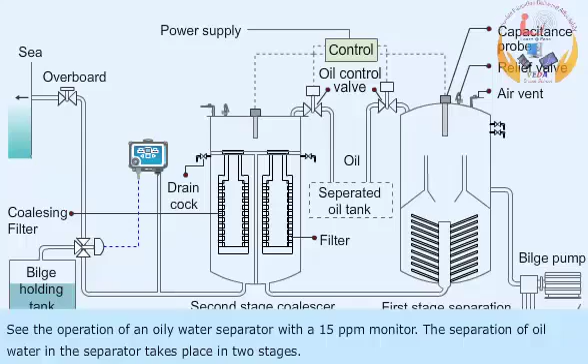Oily water separator. See the operation of an oily water separator with a 15 ppm monitor. The separation of oil and water in the separator takes place in two stages. In the first stage, the separation is by gravity, whereas in the second stage, the separation is by coalescing filters.

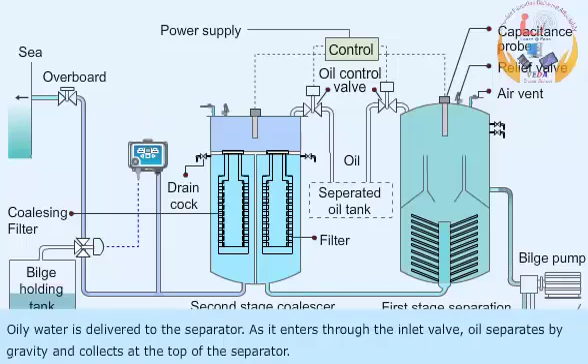The bilge pump delivers clean seawater to the first stage of the separator through the inlet valve. The vent is kept open till all the air is removed from the separator and water issues out. Oily water is delivered to the separator. As it enters through the inlet valve, oil separates by gravity and collects at the top of the separator.

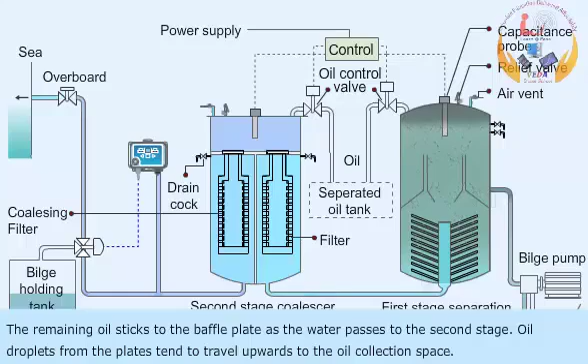The remaining oil sticks to the baffle plates as the water passes to the second stage. Oil droplets from the plates tend to travel upwards to the oil collection space. Oil from the top of the chamber is automatically drained to the oil tank when the level reaches the bottom of the sensor as shown.

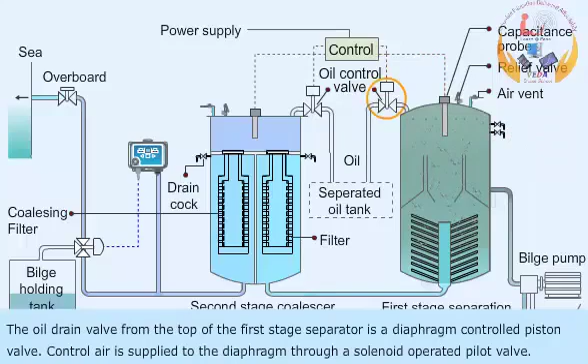The oil drain valve from the top of the first stage separator is a diaphragm-controlled piston valve. Control air is supplied to the diaphragm through a solenoid-operated pilot valve. The capacitance probe senses oil quantity in the collection space and energizes the solenoid through the control switch.

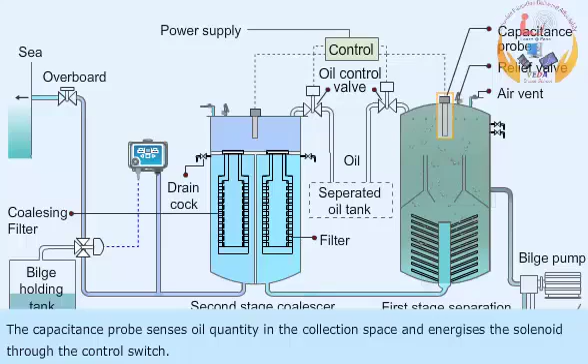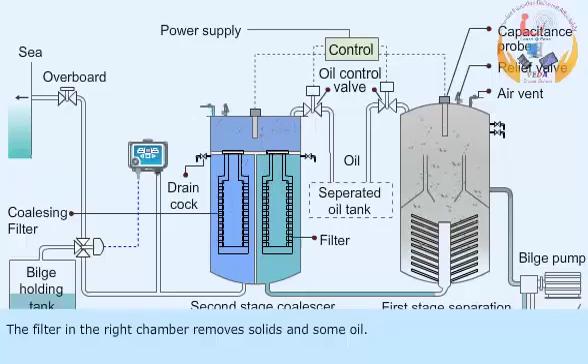Water passes downwards from the first to the second stage coalescer through a central pipe. The filter in the right chamber removes solids and some oil. Coalescing filters in the left chamber take out the remainder of the oil in the form of small droplets, which coalesce to form larger drops. These rise to the oil collecting space. Oil content of the final discharge is below 15 ppm.

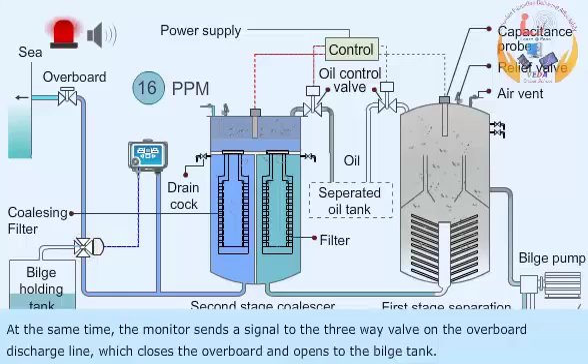In case the discharge of water after the second stage is more than 15 ppm, the monitor senses this and gives an audible and visual alarm in the engine room. At the same time, the monitor sends a signal to the three-way valve on the overboard discharge line, which closes the overboard and opens to the bilge tank. The sensor reverts to normal operation once the oil content drops below 15 ppm.

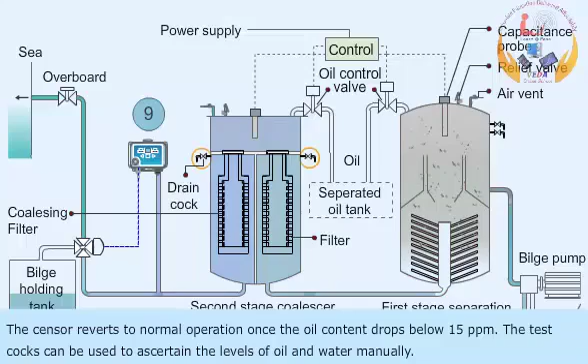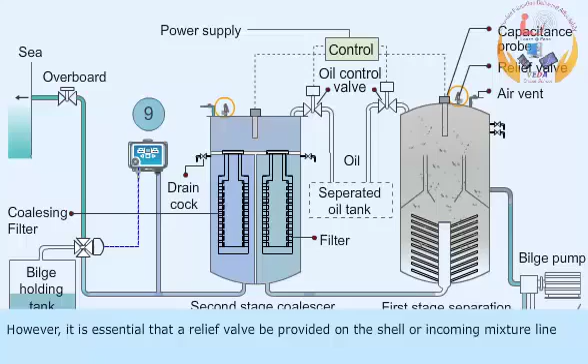The test cocks can be used to ascertain the levels of oil and water manually. A spring-loaded valve is usually fitted on both discharges. However, it is essential that a relief valve be provided on the shell or incoming mixture line to prevent overpressure and accidental discharge to a confined space or overboard under all working conditions.

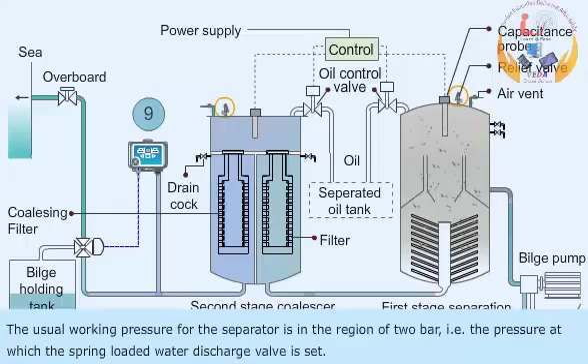Such a relief valve should preferably be led back to the suction side of the supply pump or to an overflow tank. The usual working pressure for the separator is in the region of 2 bar, that is, the pressure at which the spring-loaded water discharge valve is set. The relief valve is set at approximately 2.5 bar.